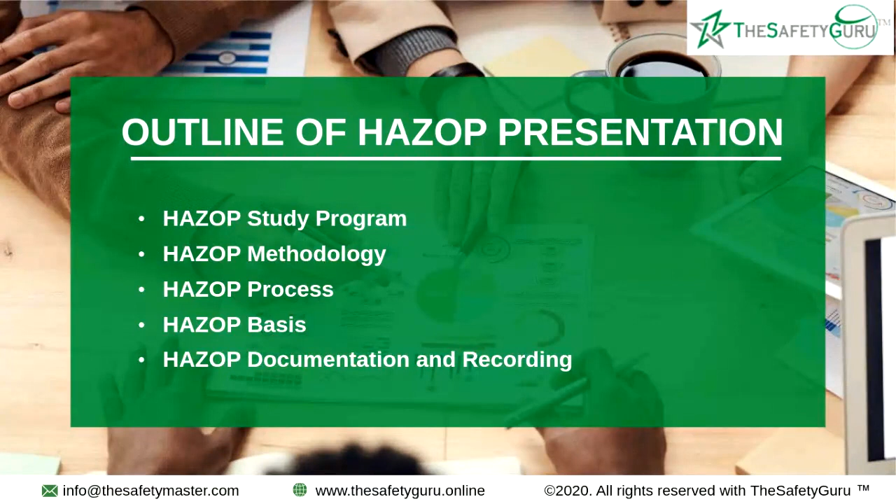What is HAZOP? As I explained, HAZOP is a tool to identify potential issues. It is a systematic, rigorous examination to tell you what are the issues in the process and engineering area. It is also a qualitative technique to combine the standard guide words with the process parameters and understand what is the deviation. Deviation means what is the problem, what can be the scenario, what can go wrong. You can call it a hazardous event or a scenario.

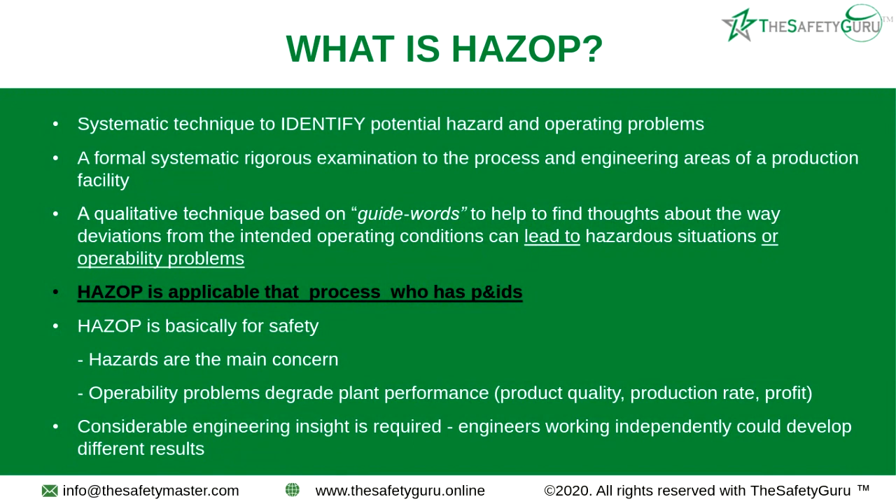Then HAZOP is also able to bring out the qualitative impacts, like the consequences. It can also tell you whether your existing safeguards are sufficient or not, and if not, what is required to be done. So basically, it brings out your hazards, your consequences, your existing safeguards, whether they are sufficient, and gives you recommendations also. So it is a win-win situation for both hazard and operability issues. So this is about the HAZOP study.

What is the main purpose of the HAZOP? When we design a plant, we do a conceptual study before the design. In the project management cycle, we do a conceptual study to see whether this plant is feasible or not, whether we can produce this product or not. During that stage only, we try to do a preliminary hazard review, maybe by some checklist method. People generally call it a hazard review.

So it is called as PHR, preliminary hazard review. So it is a checklist based method. But when design is done, you have put the design, then you see that okay, now process parameters are there. So what can go wrong? So that is basically brought out by a HAZOP study. So it tries to find out the deviations from the design intent that may go wrong.

For example, if a tank has to be filled by a centrifugal pump at a flow rate of 4 meter cube per hour, or 400 meter cube per hour, how much time it will take? It is a design. Now suppose there is a 10% positive or 10% minus. There is a change in the capacity of the pump during the operation. Then what will happen? What will happen to the reactor? What will happen to the pipeline? What will happen to the chemical nature? What kind of scenario will be created if the flow is less or more? This is what HAZOP does.

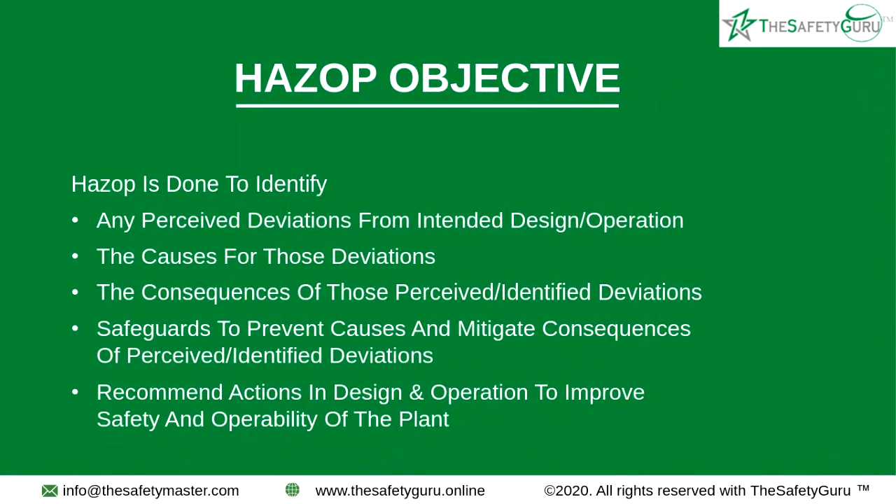So today the lecture is HAZOP tool as a part of the PHA program. So you need to learn the complete PHA, then you need to learn 8 to 10 tools. Okay, so HAZOP is only one tool. So by the end of the presentation, you will understand the difference. So I go to the next slide. What is the design intent? Sorry, what is the design intent?

So can we open the discussion here, Arun? Design intent. Again, your mic is on. You can use your mic.

Okay, guys, I want to ask maybe one or two students from you. What is design intent? Can you just give me one example?

So every product is designed for a particular job, meant to satisfy a particular condition. For example, if we are installing a 4 dia pipe to transfer a liquid from one place to another, it has an intent to transfer that liquid. Okay. Perfect.

Perfect example. You have not named yourself. I'm sorry. Can you tell me your name? Prashant, sir. Prashant. See, Prashant, perfect example.

Let's look at the larger picture.

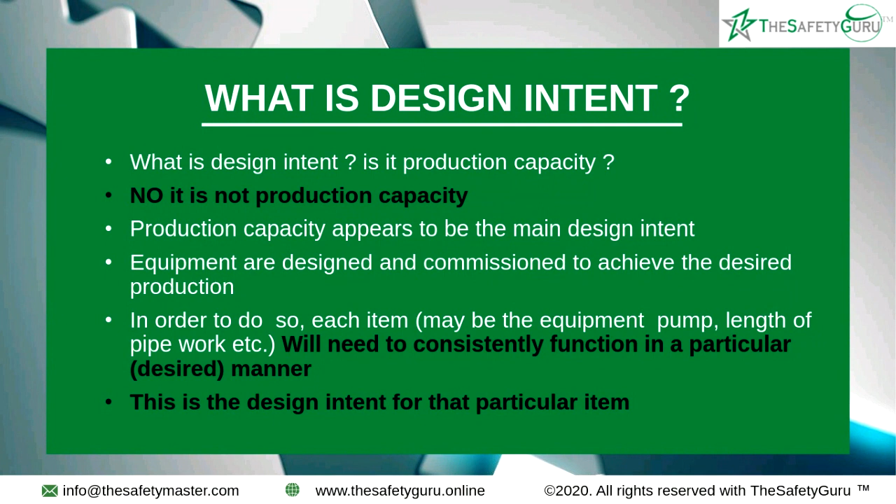Okay. So this is about design, how a design intent is defined and how deviation can occur. So I will leave all these things, which is theory, and I think I have explained it to you very well. So, types of hazard analysis. What are the different tools for HAZOP? First is the preliminary HAZOP, which is done at the conceptual stage. Write it down, guys, if you have.

Second one would be the design hazard review. Third one would be operating plant commissioning, PSSR, pre-startup safety review. This is also part of hazard review only. Then the operating plant hazard review. Then fifth one is shutdowns or startups after a long shutdown, like COVID.

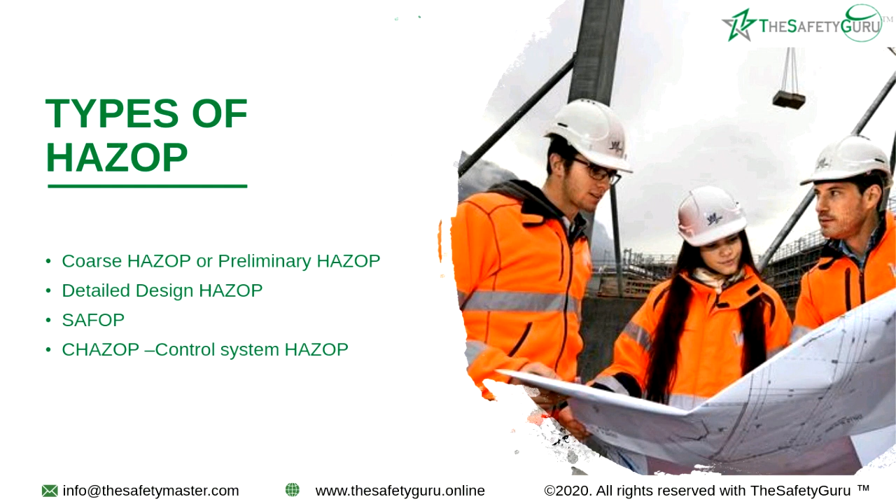Why has it happened? Because people have not done the proper hazard review after a long shutdown. This is the only reason I can see, preliminarily. I'm not commenting on any kind of report, but preliminarily I can see it. But there may be some other hidden reason also. Some human error can also happen. So these kinds of hazard review at different project management cycles of a process need to be carried out.

Then we have electrical hazard review. I am not an expert in electrical hazard review, which is a separate tool. It is also called HAZOP, electrical HAZOP, which is done by electrical people, but the principle remains the same. I am not an expert on electrical safety, so I may not do it. But the HAZOP chairman can facilitate that session of electrical HAZOP.

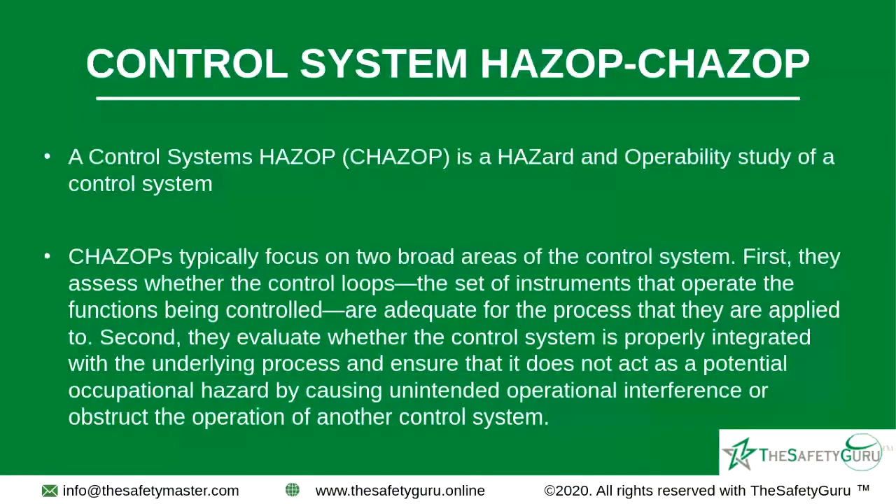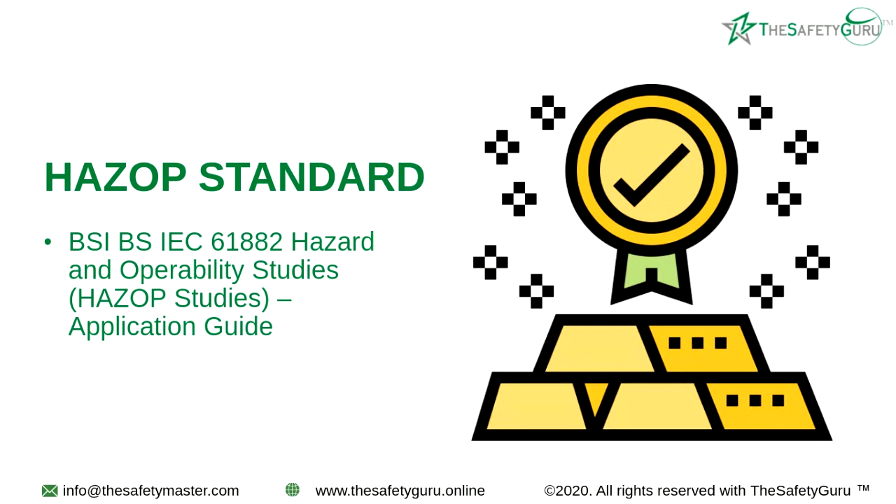Then some people who are instrument engineers carry out control system HAZOP, loop hazard review during loop testing and other stuff during the design stage. So they can do those things, but the principle remains the same. What are the standards with respect to HAZOP? It is IEC 61882, Hazard and Operability Studies Application Guide. Or you can refer to Trevor Kletz's book on HAZOP study.

But as soon as you see that the chemical entering the tank has a change in operating parameter by any utility mechanism, then you need to take the tank as a separate node so that you can identify the hazard of the process, because the process condition might have changed. So in short, whenever there is a change in the hazard of the material, a change of the process conditions, or a change of the equipment or pipe sizing, the hazard may change and you may like to review. So accordingly you have to mark the nodes.

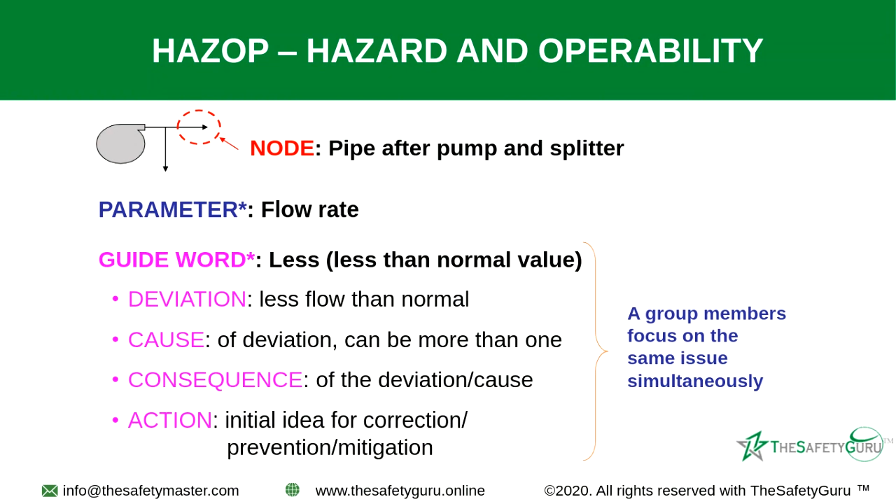So what are the documents required, guys? You require just a process flow sheet, a simple diagram, a little bit of description of the process chemistry. For detailed HAZOP, which is called DHR and PHR, you need a proper P&ID, process calculations, cause and effect diagrams, instrument data sheets, interlock details, layouts, and you may need a detailed process SOP. This is what you need.

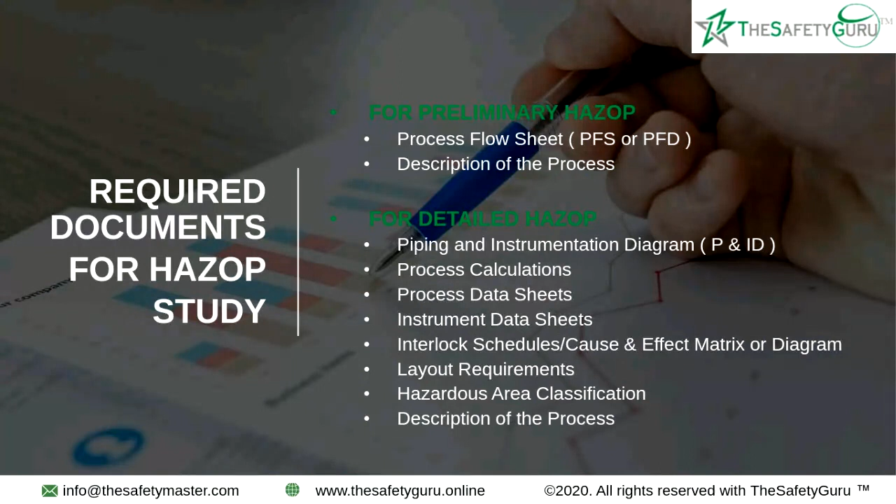HAZOP process: what are the HAZOP process sections? First is defining and marking the node. Second is defining the design intent. Third is listing down the deviations. Fourth, for each deviation you need to write down the causes. There may be 2 causes, there may be 3 causes. For each cause you need to write down the consequence separately. So it is called cause consequence pairing. In one deviation there may be 3 causes and 3 consequences. All 3 consequences may be the same, or all may be different. So that is a combo.

For each consequence you need to evaluate the existing safeguards. Existing safeguards may be the same, or they may be different. Then you also need to define whether the safeguards are sufficient or not, and you need to put down the action. So this is basically the process of the HAZOP.

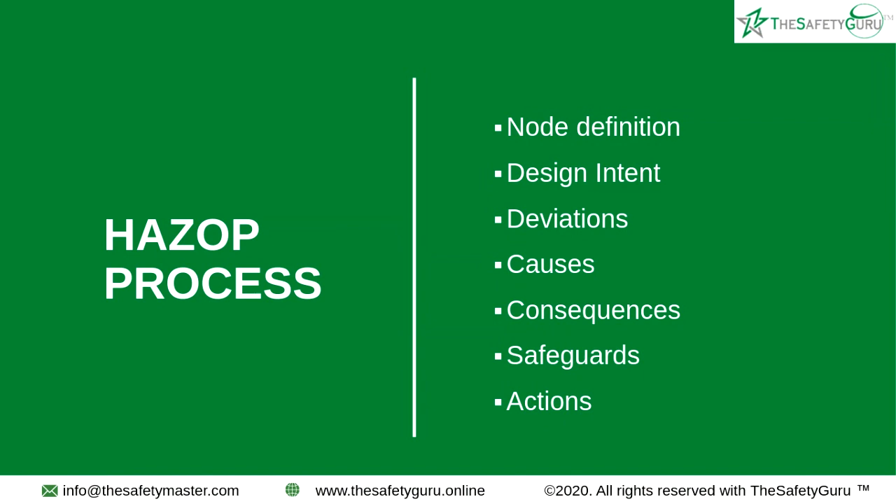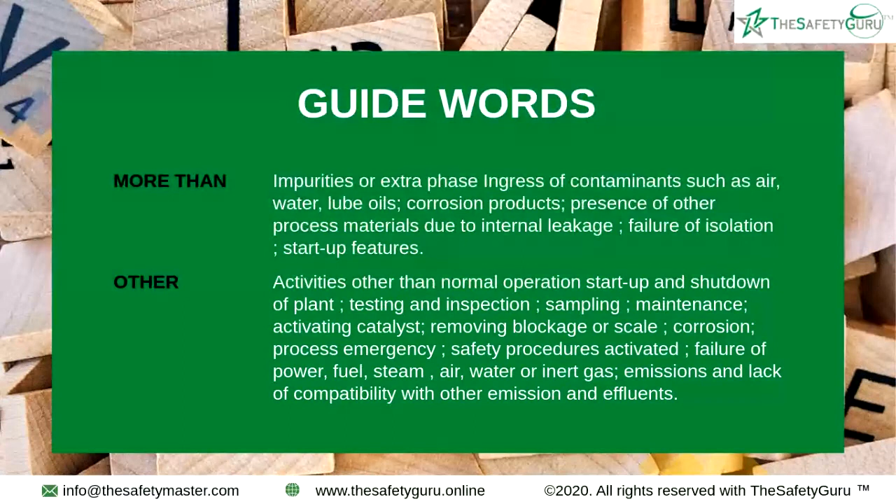What are the guide words? First is more than, second is other than. More than, for example: there is a percentage of a particular chemical which we need to put. If you put more than that, it is definitely going to create a problem. Other than: if you put a different material, or you start different equipment, it can be other than. Similarly, there are different causes: equipment failure, control failure, human error, process condition failure, external events. The type of causes can be primary, which are directly related to the process, or secondary. So you can explain it in the causes column.

Okay. Now there is an interrelation between whichever node we are analyzing. There may be, I think, multiple causes. Okay, but the cause for a failure for a particular node will be before that particular node, before that particular section, and the consequences will be either on that particular node or forward into the forward node. This is the thumb rule of the HAZOP.

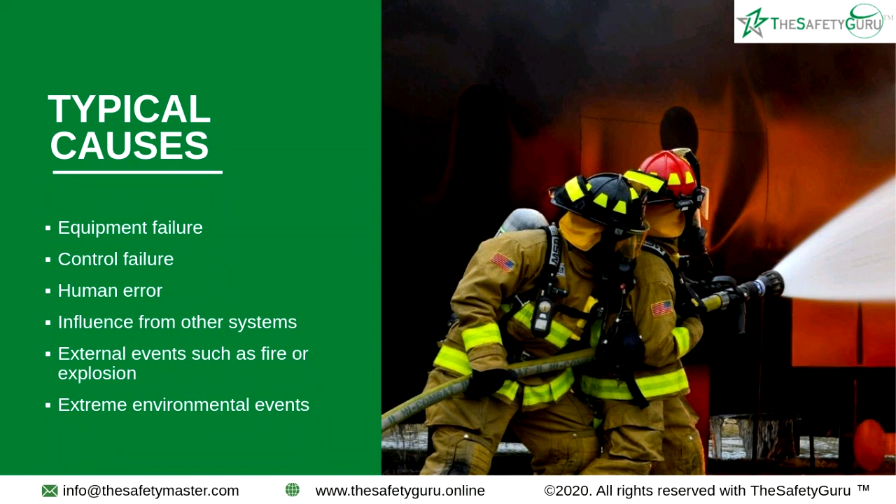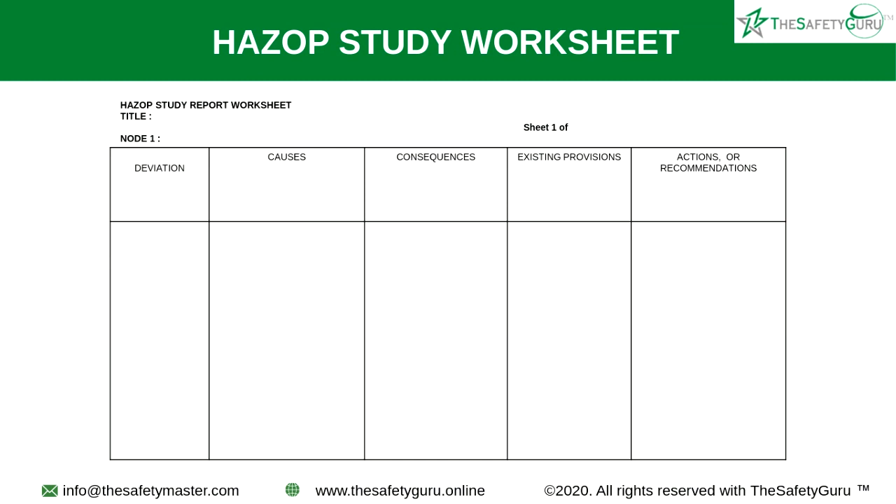Now, HAZOP study can be done during normal operation, during management of change. When you apply a management of change, you need to do HAZOP. If you are changing any plant materials, equipments or processes or instrumentation, you can do a HAZOP on that section and update your report. Okay. So these are the certain aspects where you can do the HAZOP study.

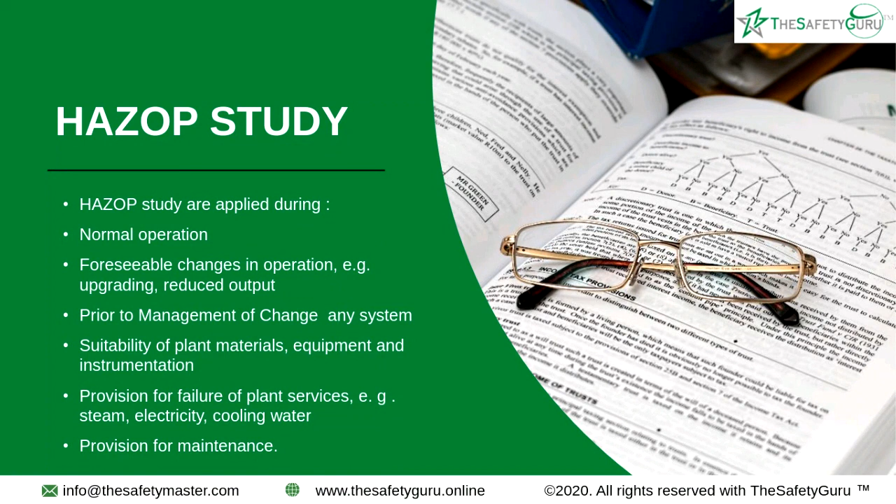Second portion is the scribe. The quality of the scribe is that he should be a technical person. He should be able to understand the discussion. He should be able to note down that discussion into summary and record the thing. So these are the qualities for a scribe. Both roles are different. In India, the culture is not that mature to have different manpower for these things. Sometime only HAZOP chairman comes, sometime a junior person comes and does the HAZOP. I mean, it is a mix according to my experience. Okay.

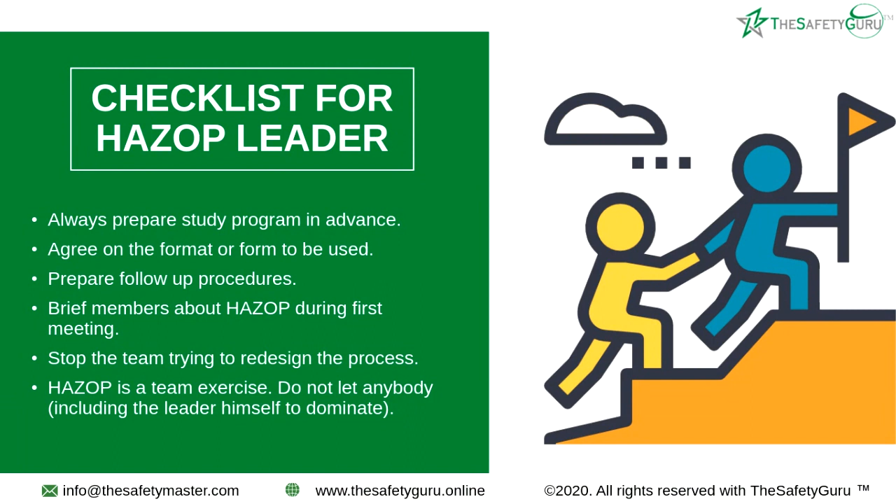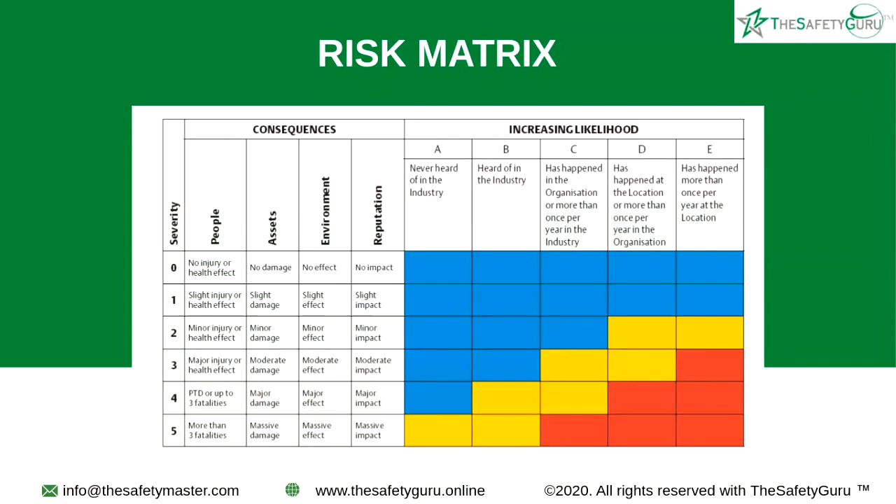You can choose likelihood. So probably for most of the components, the data has been written into the books, and you can choose the probability accordingly. Otherwise, you can also take the safety data from the company for severity or for likelihood. Okay. Otherwise, if you want to go quantitatively, then you have to do assessment and layer of protection if you want to be very specific, which is done in refineries also, or a particular hazardous chemical plant. A separate QRA and LOPA is done. Then inputs are taken into the HAZOP.